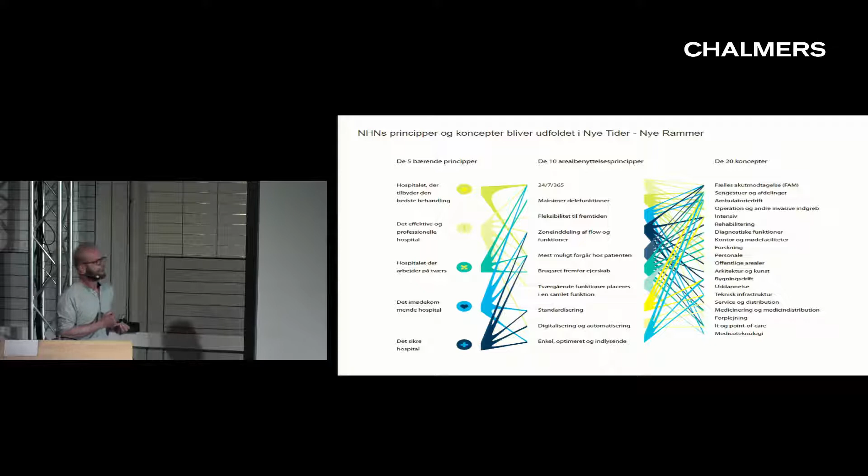And you get those very detailed binders of information that you have to process into a project proposal for the competition. Here was a little bit different. I think the program was very inspiring because it talked of principles, area use principles, and concepts for how these things should go together. And it was not tying everybody down into exact square meters and stuff like that.

So I think it all circles around these principles and concepts, around that we need to structure a hospital in a new way so we get the most out of it. And we have, first of all, to put the patient first, to put the patient in the center.

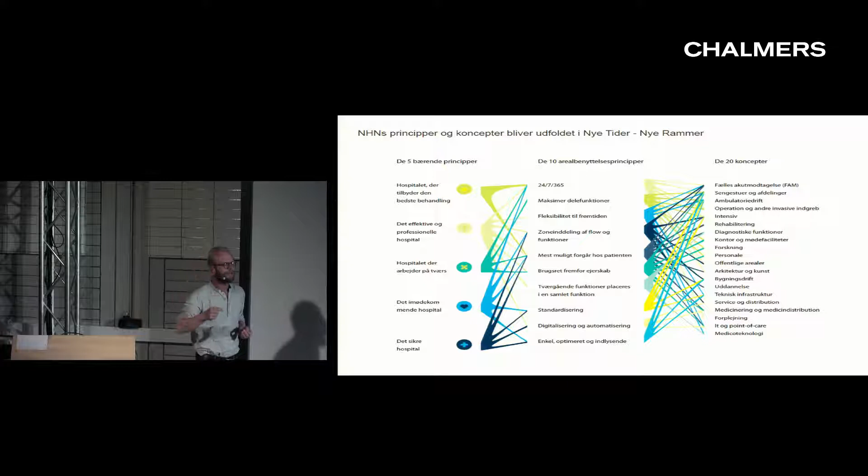This drawing, I don't know if you're familiar with Rorschach drawings, are you? Those kind of dots you get when you go to the psychiatrist, and you should look at them and tell what you associate with them. This is how we saw that one in the competition brief. It sounds a little bit fluffy, but I still think it's the right way to go, to actually ask for what it is that you want to achieve rather than specifying all the different rooms. So that was a very inspiring brief.

The other thing that really inspired us is the landscape, the site where we have to build this hospital. It's a greenfield hospital. Maybe I should just tell you how big it is. It's 122,000 square meters. It has about 660 bedrooms and 13 specialities. And the total investment is about 3.8 billion Danish kroner, with a construction budget of 2.2 billion Danish kroner. So this is the size of it.

But what really got us moving was, besides the brief, also this site. It's a very pristine area just south of Hillerød. And the landscape is very soft rolling hills. It's not too high. We have forest, we have grasses, we have meadows, but it's all held on the horizontal. And the sky is a very important element for being on that site.

So you could say that both the brief with the patient-friendly hospital and all the healing aspects, but also this site made us want to do a very low hospital. We thought that whoever should be there should be in very direct contact with nature and all the qualities on the site. So we started off by looking into different principles of how to organize the hospital in such a way that we could keep it low but still efficient.

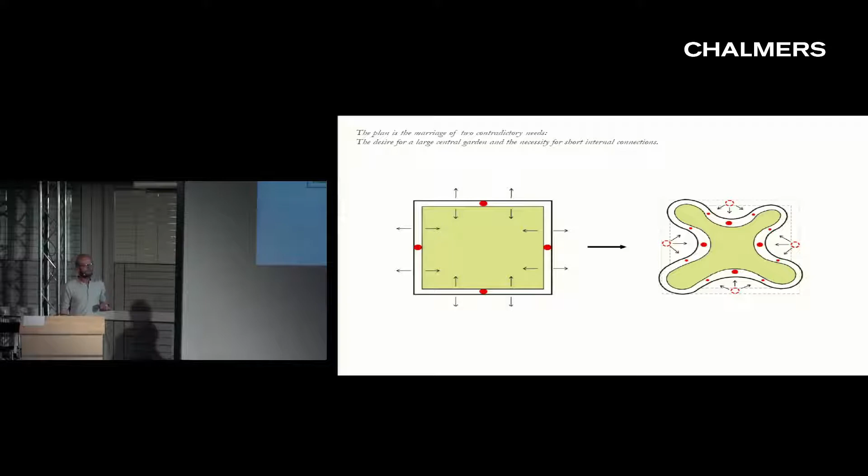But in order to get very short distances from a central point, we decided to move the red dots together, so there will be very close proximity from the center of the building to the cores, staircases, elevators of the complex. So this is why we started to look at this clover-shaped building, because in that way we could obtain efficiency and proximity to all the cores from a central point and still keep it low.

Now, the way we chose to organize that was in a 4-story building where the two lower stories are diagnostic and treatment, and the 2 upper floors are bed wards.

The way that the square meter works is that the bed wards only occupy the perimeter or the rim of the form, whereas the 2 lower floors actually take up most of the footprint. So on the roof of level 1, we had the possibility of having a big central garden.

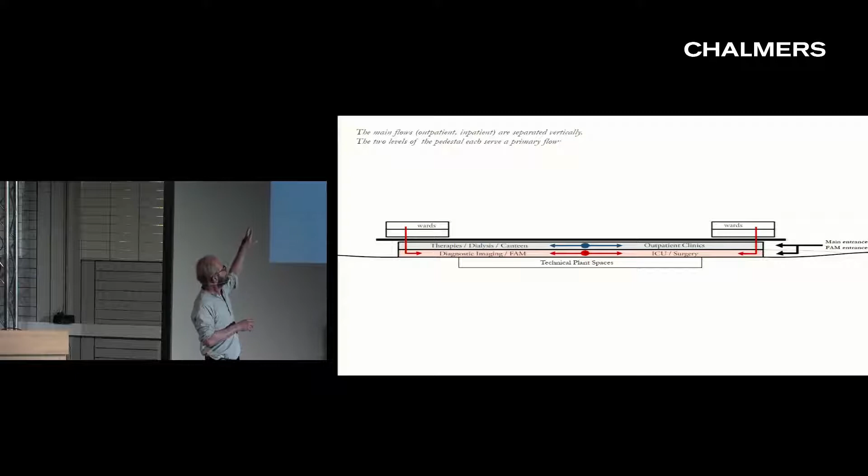Now, the way that we arranged the base or the pedestal was that on the ground floor, we had all the hot floors, all the very heavy technical installations, the diagnostic imaging, and this joint emergency department, the FAM, as well as the ICU, the intensive, and the surgery. We wanted them to be in very close proximity in order not to push the patients around too much.

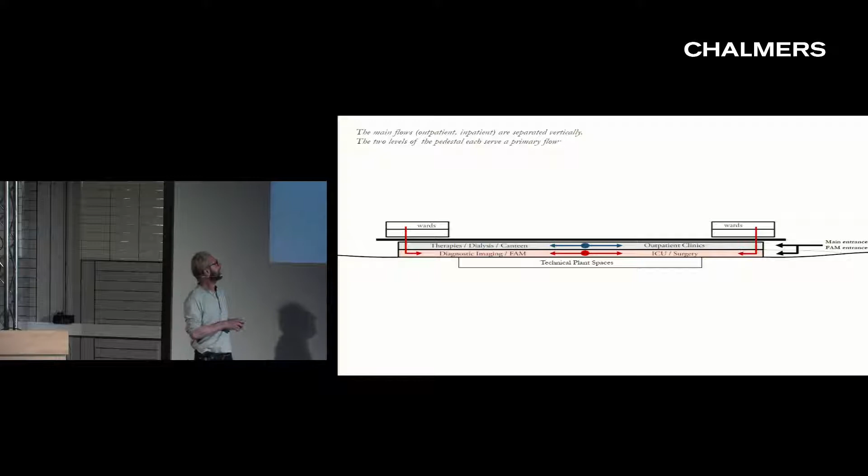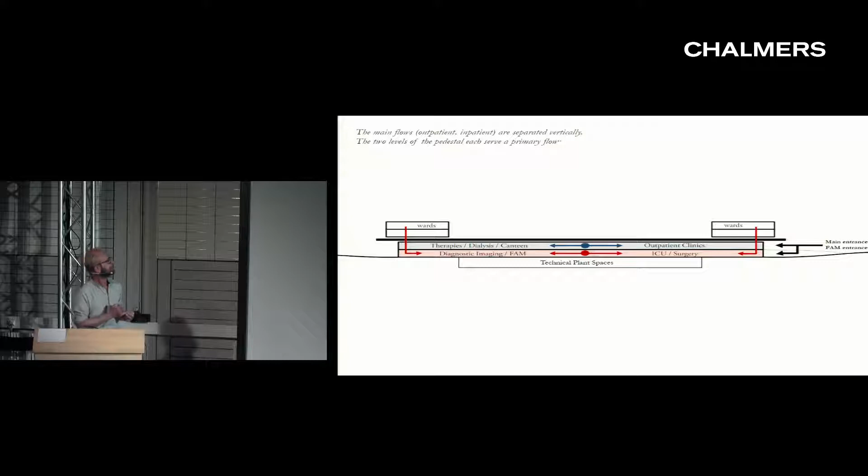On top of that, we had a floor mainly with outpatient clinics for day patients. And this is also where we would want to have the central lobby of the hospital. And then on top of that, of course, the 2 ward levels. The blue arrow here explains what the outpatient flow is, whereas the red is mostly the bedridden patient flow. And those two are separated. That's very important for us.

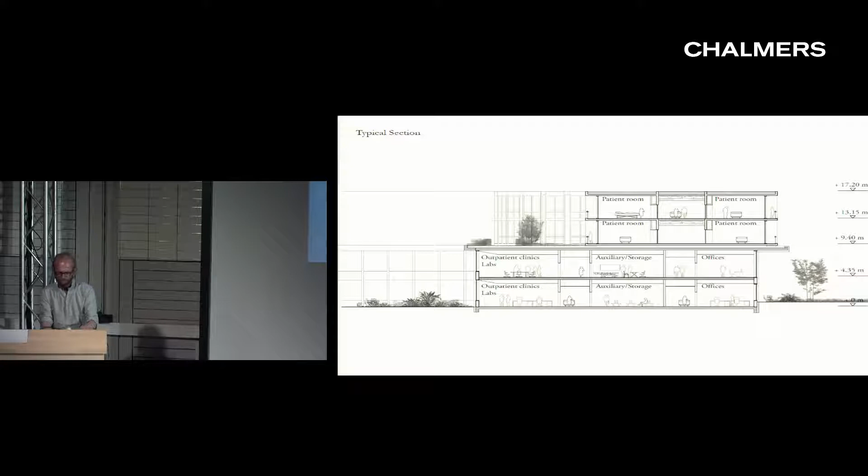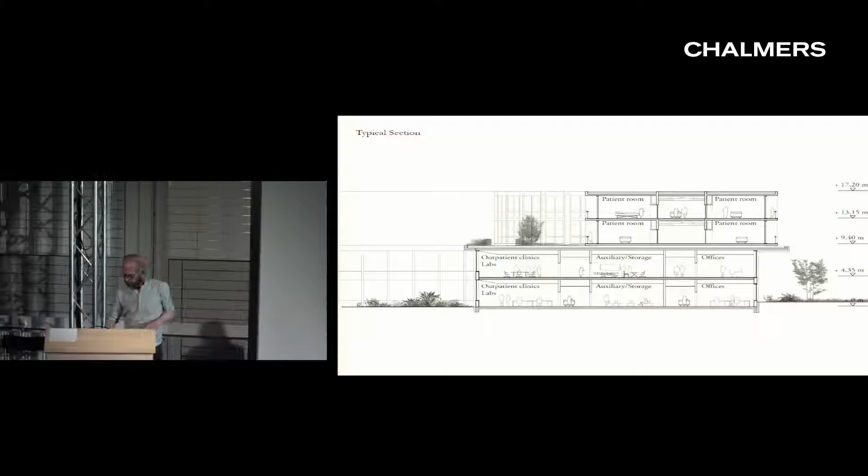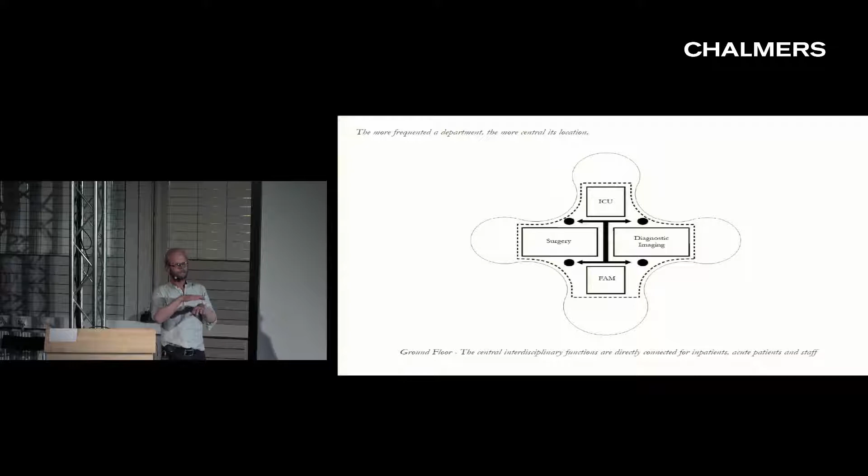If you take a closer look at it, you can see how it looks. It's a very low hospital that sits in the landscape, and it does have gardens above level 1 and gardens on ground floor also. Once we laid out the section with the hot floors on the ground floor and the outpatient clinics, therapies and stuff like that on the first floor, we started to look for organizing principles for our hospital.

And the first thing is that we thought that the more frequented a department, the more centralized is the location. So we tried to have all the departments that were very much in use all the time be very close to the center and therefore also very close to the lobby and the 4 cores that we laid out. And the other principle would be that it's very important that FAM, surgery, diagnostic imaging, and intensive care are very closely linked without interference of any other flows.

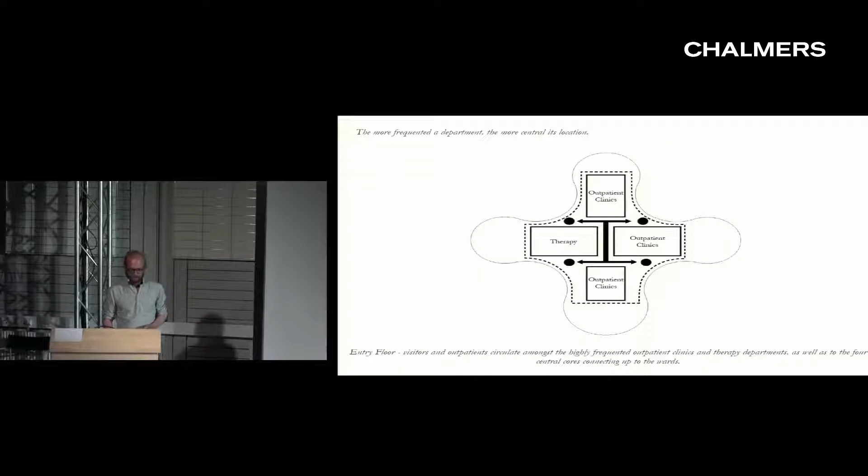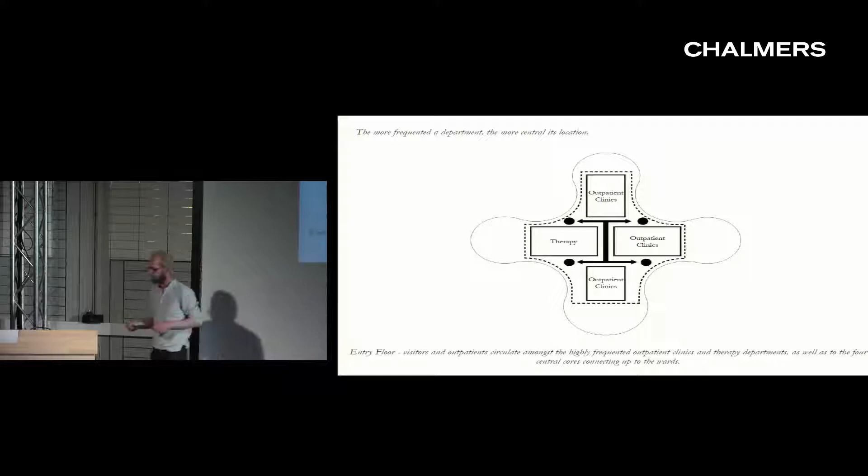That goes also for the first floor, where all the outpatient clinics and the therapies are located. They should also have the same logic that the more frequented a function is, the closer it gets to the center of the building and to the cores. Of course, when you prioritize, there are some functions that we push to the far side. And that would be offices, research, labs, and also the wards for the FAM, the Joint Emergency Department. And that's a choice.

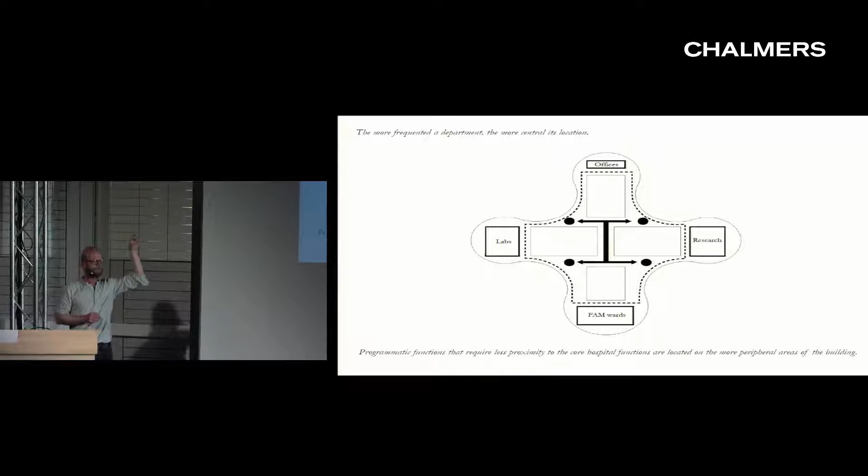I'll do this in English. I think it's part of the operation department on the ground floor, but it has a direct link to the bed ward related to the heart department.

Now we talked about the importance of having the vertical cores with the bed lifts, the patient lifts, the goods lifts, and the AGV lifts located so they can service both the central core, but also the 4 leaves of the clover.

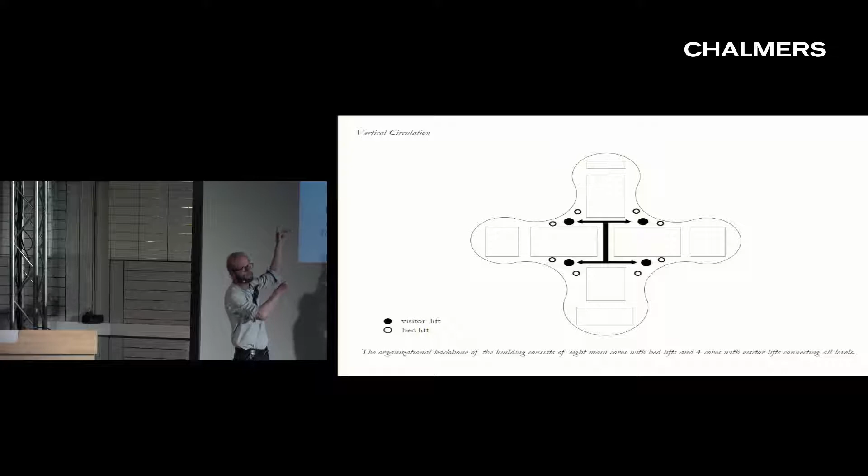When you look at it, if you take each floor plate and lay it out like that, you can see, can I point with something? Do we have a

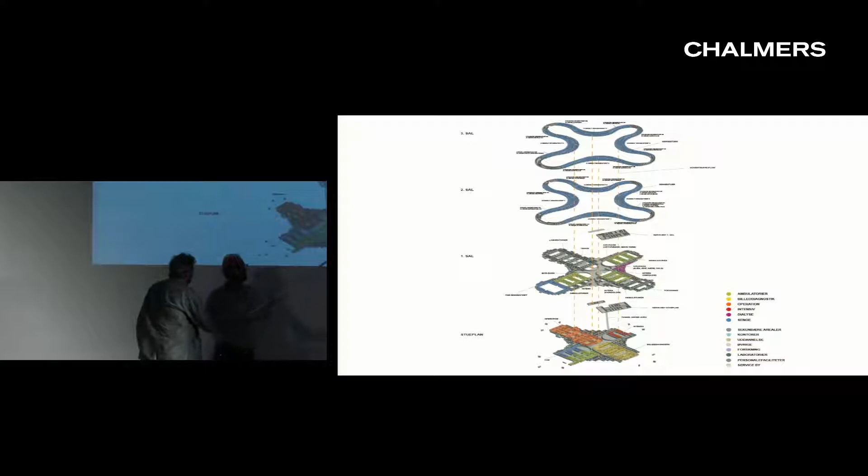stick or an arrow? But maybe you could see the way that it works, that on the first floor we have the entrance and the main lobby with the outpatient clinics feeding into it and the therapy. Below that we have the FAM, the diagnostic imaging, the intensive care and the surgery department lying down there. And on top you see the 2 layers of wards.

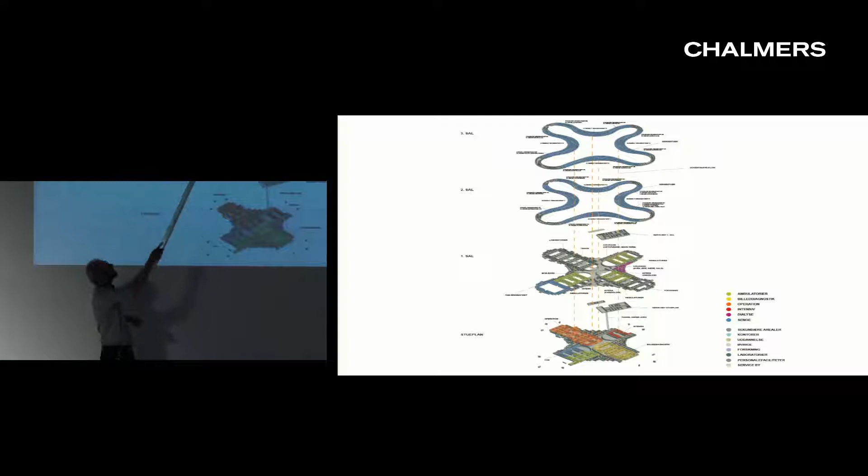Now, we think that flows are actually one of the main factors you have to think about when you design a hospital. It would be fair to say this is the first hospital I've ever designed. My background is more in designing airports and doing lab buildings, so this is the first one.

But when we got closer into designing the building, I realized that it's in a lot of ways like an airport. In an airport, you have to design for flows also. You have arriving passengers, departing passengers. You have to think about the Schengen, non-Schengen passport situation. We have to take care of food, luggage, waste, security, customs, and things like that.

When you design airports, this is really what you need to think about: how all these flows are functioning without interfering with each other. In an airport, it's about security, and it's about efficiency. In a hospital, it can be about lives. So if the flows don't work properly, it takes too long, you get mixed up ways of moving through the building, it's not going to be very good.

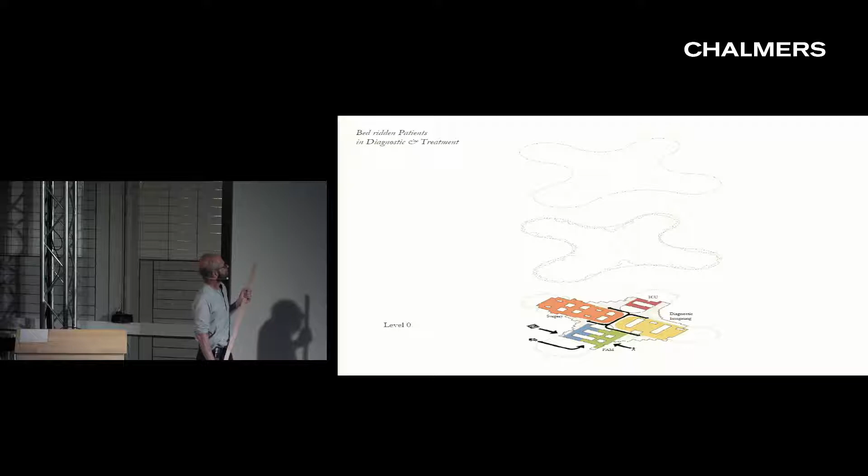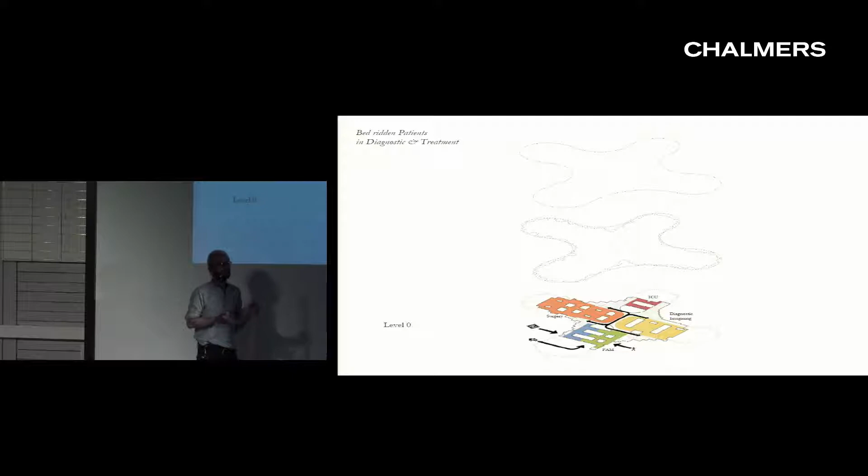So actually, these diagrams that I'm going to show you now are really the most important things to structure the whole hospital project. The first one is the bedridden passengers or patients. When they get to the hospital, they usually come through FAM, this joint emergency. This is where we have the reception for all patients coming, either by helicopter, by ambulance, or on their own.

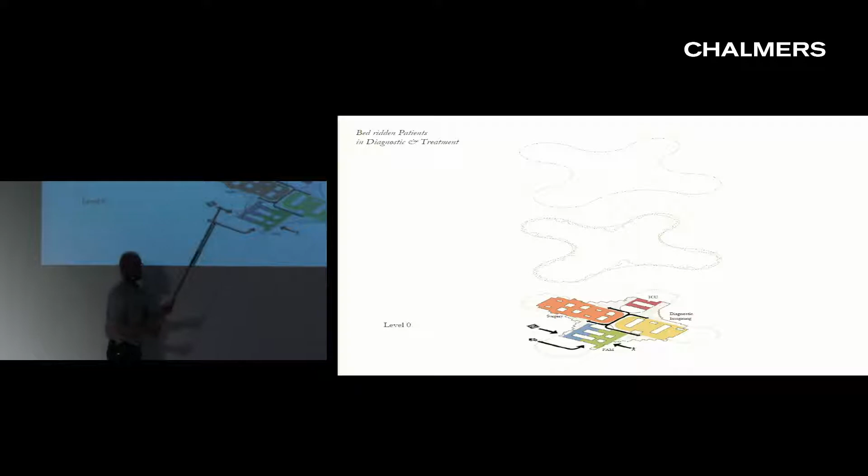They get transported into this area of the building, which is where the diagnostic and some of the treatment is taking place. It's like the mini hospital I talked to you about before. And there are some wards, some bedrooms just adjacent to that. This department has a very close proximity to the surgery, to the diagnostic imaging, and to the intensive care. So this is the main flow for them.

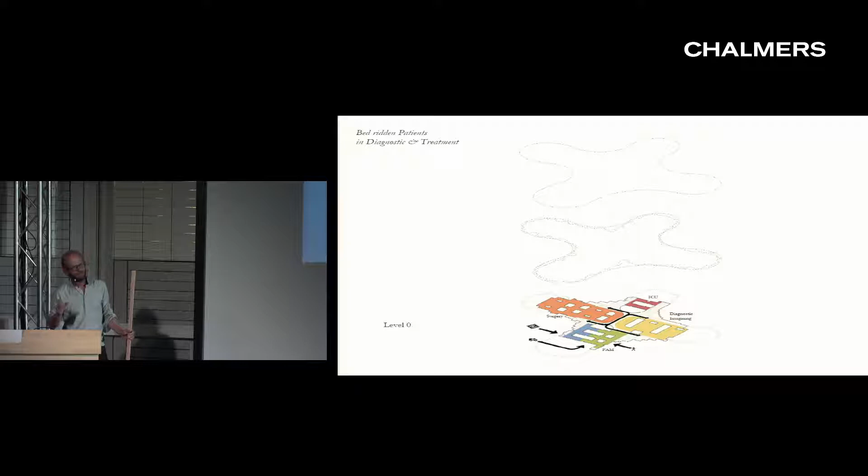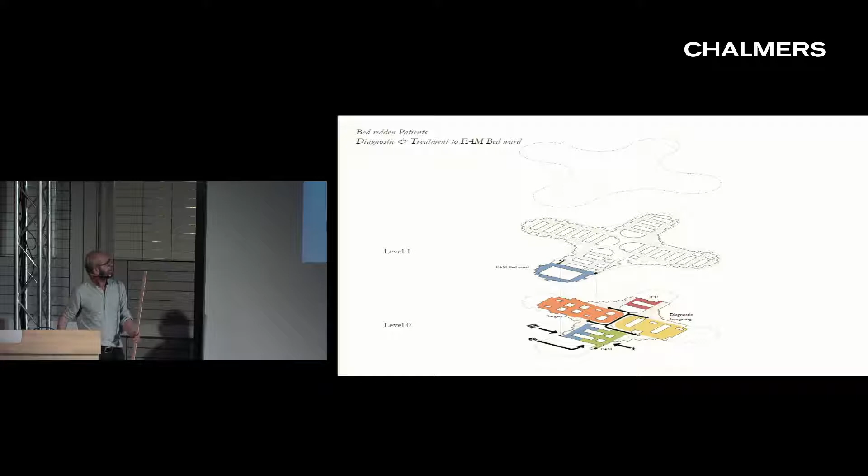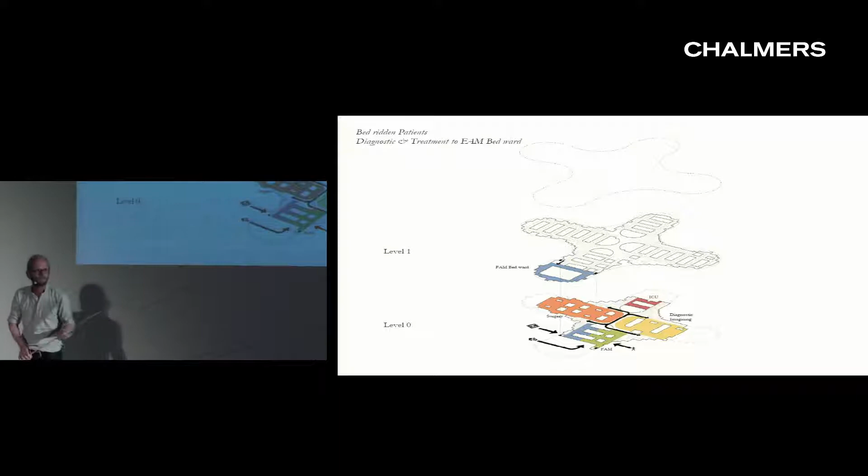Most patients coming into the FAM will stay there 12 hours, 24 hours, and either they get sent back home or they'll be sent to a department, right? This is the 12-hour beds for the emergency department, and these above here are the 24-hour beds for the emergency department.

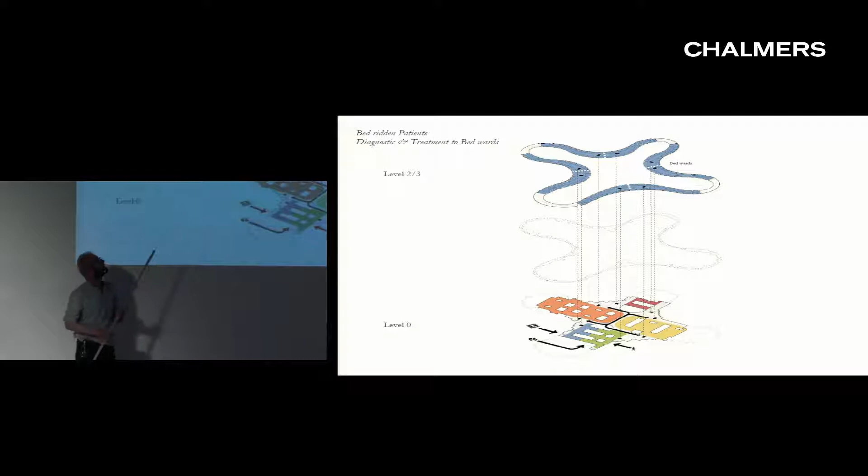It can happen that acute patients coming into the FAM need to go to the different departments, and that's where it's very important to have good bed lifts going directly to the relevant department in the bed wards.

On level 1, this is where we take care of all the outpatients. The outpatients will arrive in the main entrance here and will use the lobby to very directly get distributed to the relevant outpatient clinic or the therapy they need. This is also where we have the clinical chemical department for blood testing and stuff like that. So this is sort of more the day patient floor.

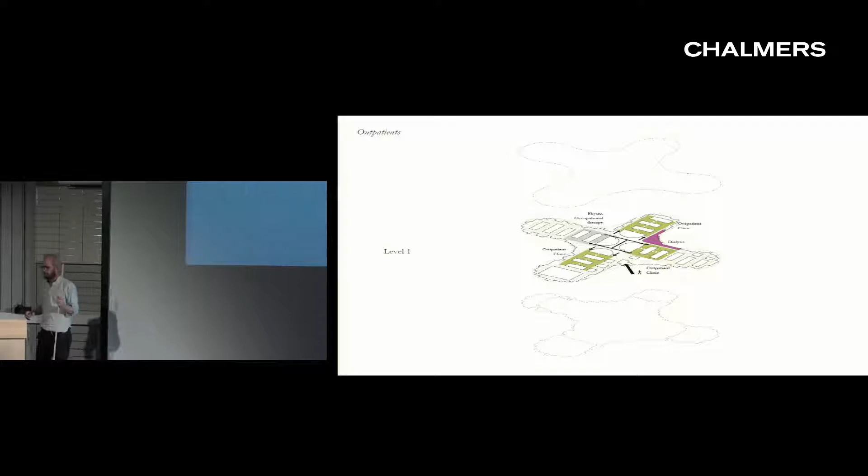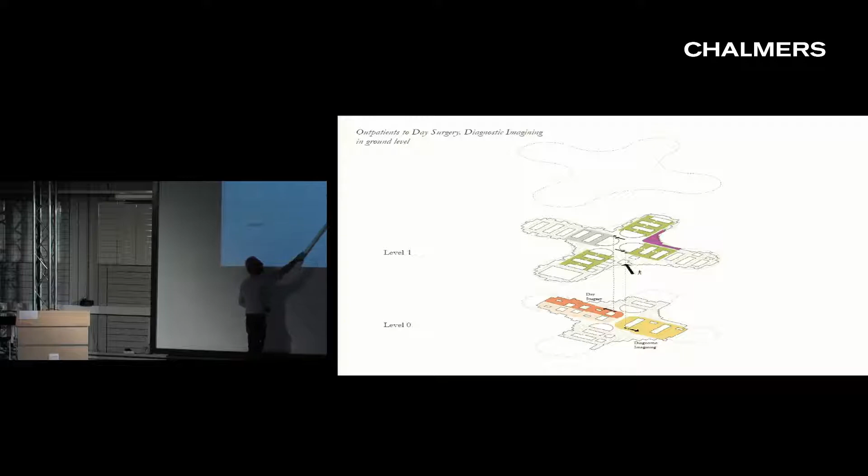And then again, all this traffic can happen without interfering with any of the flows of the bedridden patients or the staff. Now, it can happen that some of the outpatients, such as endoscopy and X-ray treatment for the day, need to go down to the hot floor on ground floor, and the way that happens is they enter through the same entrance to the lobby in the middle, and there will be dedicated stairs and elevators going down to the piece of the surgery that has to do with day surgery and endoscopy, and the same for the people going down to receive X-ray treatment for the day.

This is usually the very tricky part to solve in a hospital without crossing any main flows, but I think we managed to do that.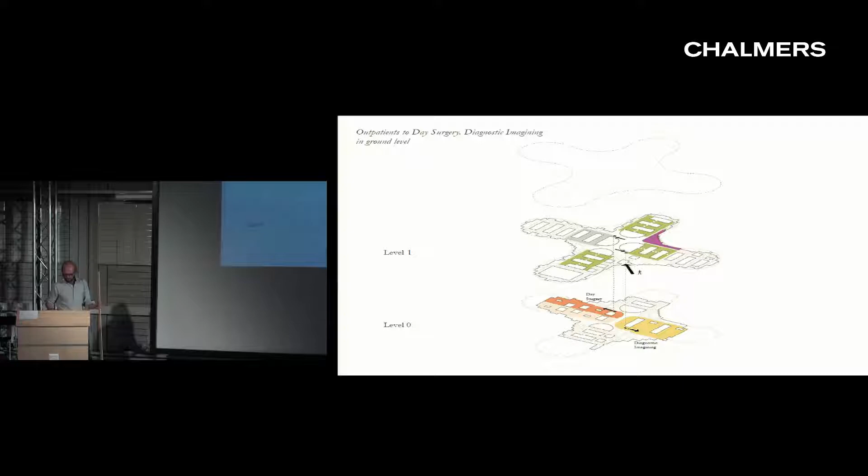Another flow that we have to accommodate for is some of the bedridden patients in the wards will occasionally need to go to some of the outpatient clinics on that floor, and we need to design a way that they can actually get transported in their bed down to the floor with outpatient clinics, get treated there and go back again.

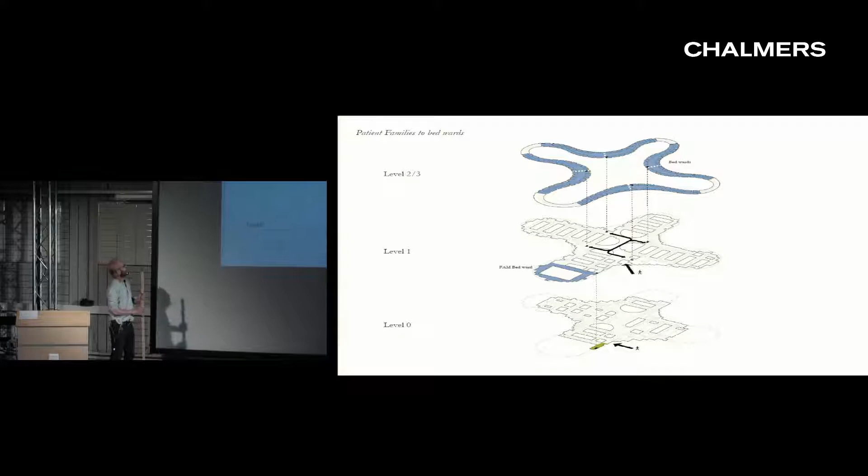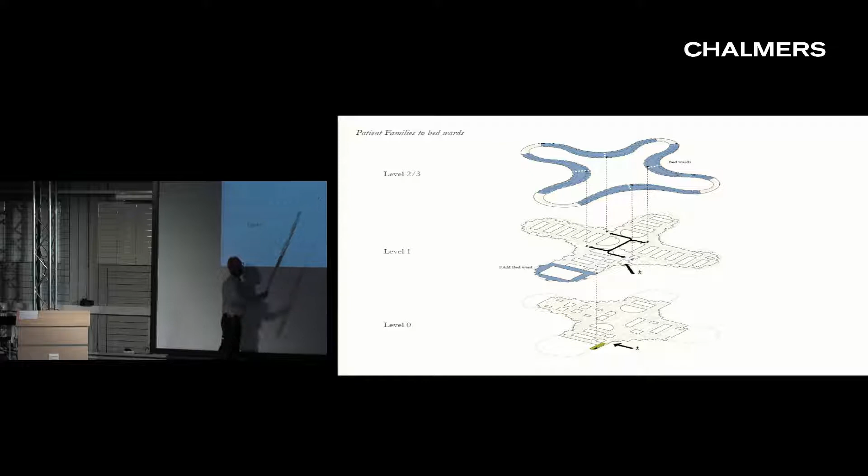Then another very important flow is families and visitors. They actually follow the same flow as the outpatient clinics. And from the central lobby, they will get sent to the wards on the two floors above, or the people coming to the FAM can actually also directly get to the FAM beds that are on the next floor.

A thing I haven't spent too much time on, but I'll just mention it, is that apart from the four-leaf clover form we have what we call a service village. That's where we have the kitchen, the goods delivery. I think we also have bed wash there. And this is all being serviced by AGVs, auto-guided vehicles, which are robots, that through a tunnel from the service village to the basement of the hospital take special packages and distribute them all over the hospital to the right department or to the right use.

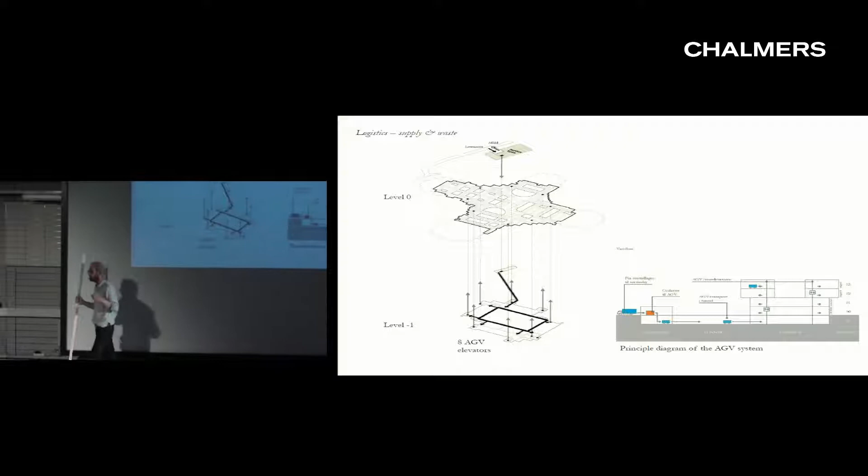Right now, we're doing the specification of this, and the wish is actually that, for instance, sterile goods get packed in special packages for each individual operation, and then get shipped to the right surgery theater. So everything that's needed sterile is there in one package, and it's all been done automatically and transported by these robots. We still have the pneumatic tube system for blood testing and stuff like that.

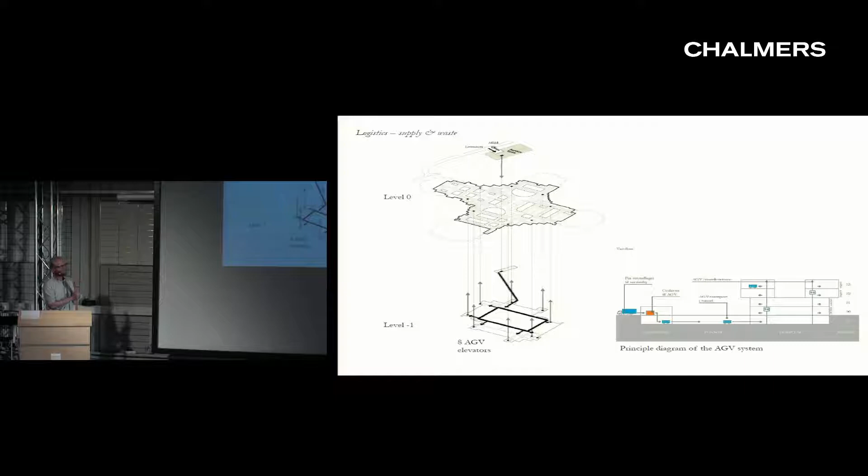So there's a lot of mechanical systems to sustain the use of the hospital. And they also have to flow in the right way in order not to jeopardize any of the other crucial flows.

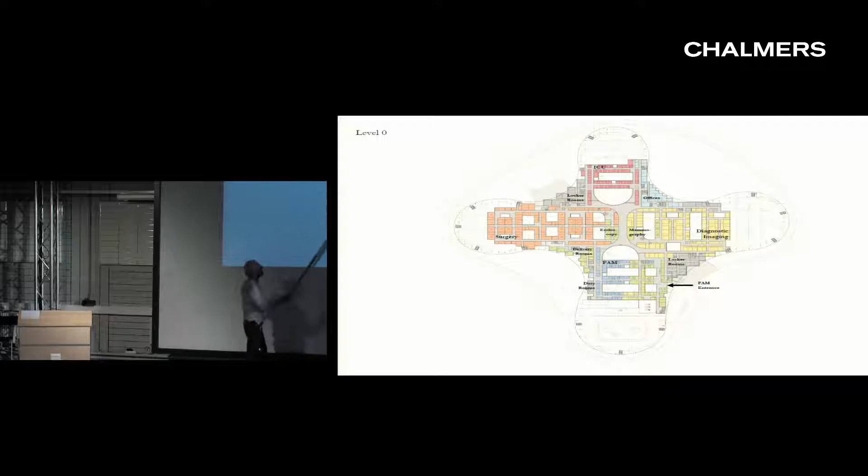This is a drawing that tells you how the ground floor is actually planned as it is right now in a real drawing. I'm done with talking about flows now, so now you can relax a little bit. But on the floor down below, we do have the FAM area here with the main entrance for people coming on their own here, the ambulance yard, and the entrance for helicopter patients. And it's divided into a diagnostic and treatment portion of the FAM and a bed portion.

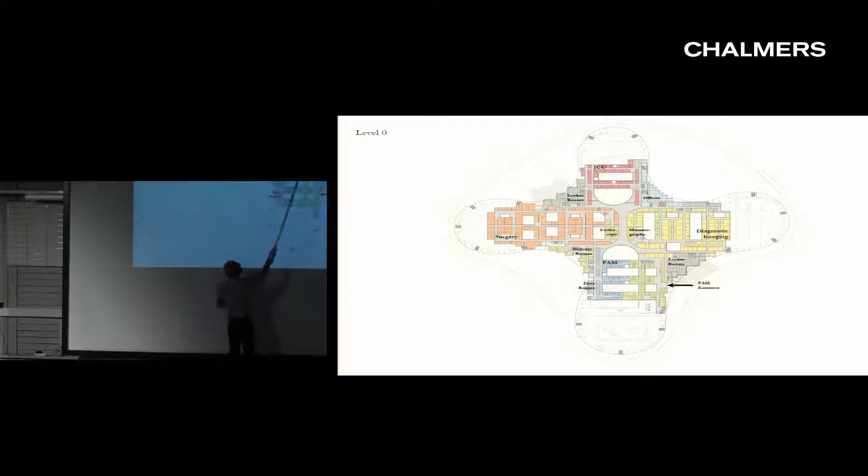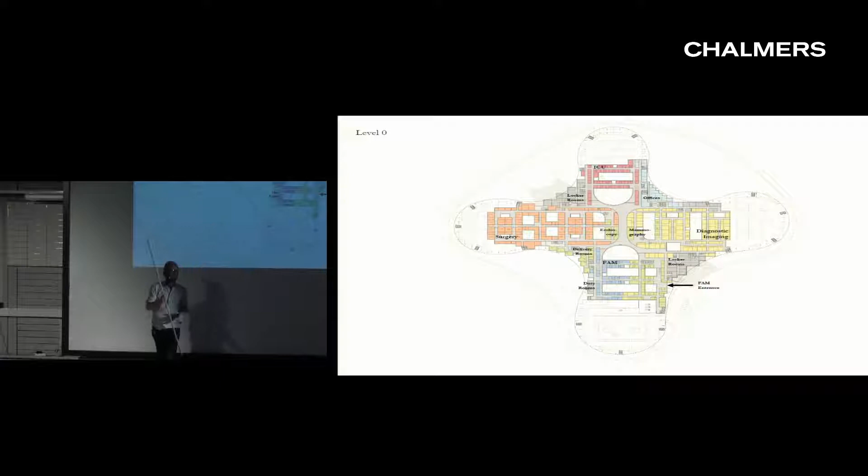Up here we're having basically uniform layouts of the surgery theaters. We got 8 different units. And I talked about the day surgery and the day X-ray treatment. Here we have the diagnostic imaging, and on top here we have the intensive care. What's very important is that the distances between the different departments here are very minimal, so you can actually get transported from one department to the next very easily. And the other one is that they're very close to the vertical cores that get them to the bed wards and even to the outpatient clinics.

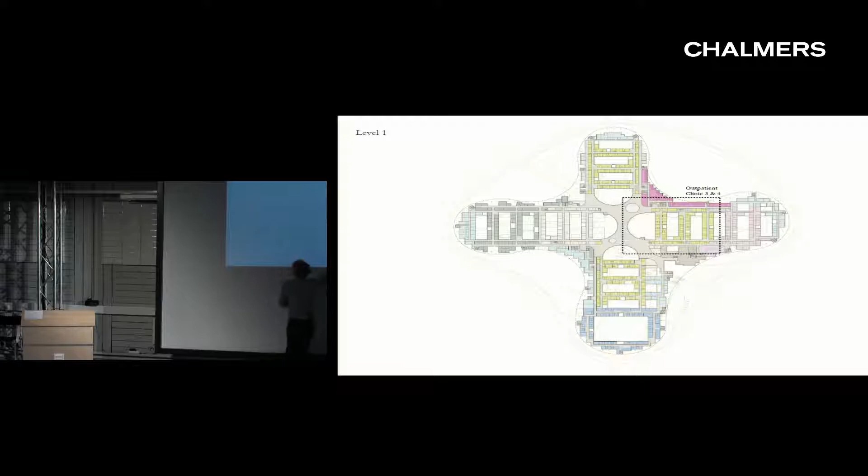You could say that the same logic goes for the first floor, where you have the main entrance coming here, and you get into the central portion of the hospital, which is the lobby, and from there, the patients can actually, along the courtyards, go to either the outpatient clinic or the therapy that they need. And the whole thing is supported by a second system, which is on the outside for staff and for bedridden patients and for goods.

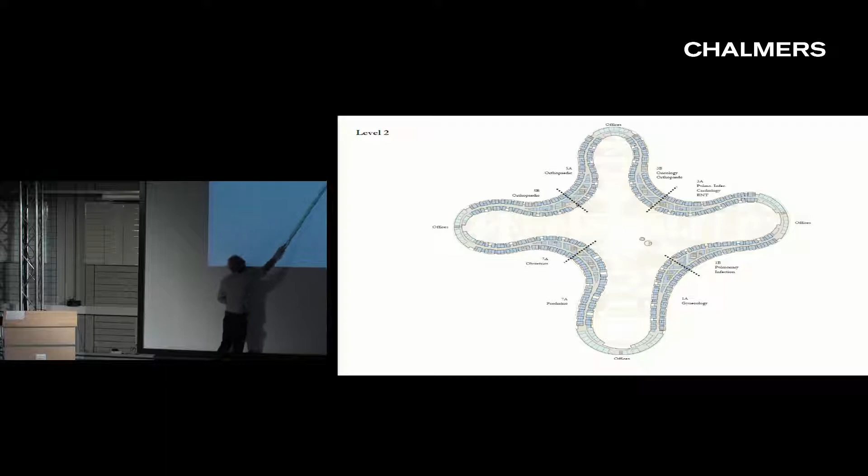On the 2 top floors, we have laid out the wards. And the wards are in a logic that we have sort of 4 alike portions, and there are 64 bedrooms in each of them, and they are arranged in 2 bed wards of 32, and they're broken down into 8 times 4. So for each 8 rooms, we have 1 nurse station and 2 departments of 32. They actually share a lot of facilities such as kitchen and lounges and stuff like that.

That was a question, right? No.

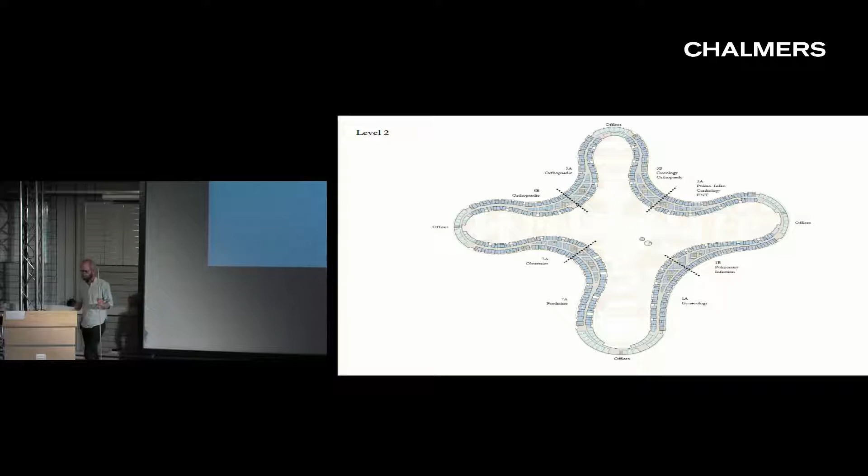If you take a little bit closer look, you can see that the way that we've arranged it is that each bedroom is about 19 square meters, including bathroom. And they've all been given a balcony, both on the inside and on the outside. And the shared facilities are mostly around here. This is also where you have all the technical, the shafts for the HVACs and the ventilation units and stuff like that. And for each department, there will be a dining area that's very close to the exterior.

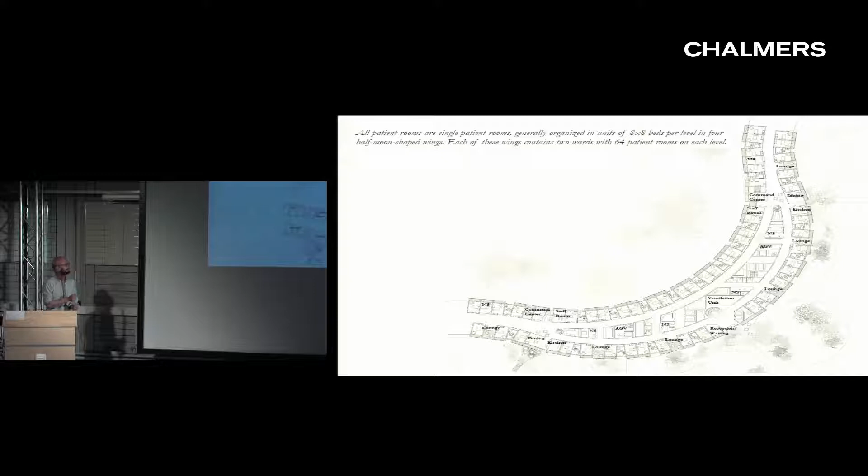Two of the departments are different, for neurology and for mother and child. The rooms are slightly bigger. For the neurology patient, it's because you always move them around in the bed, and for the mother and kid department, it's because the family is usually staying there overnight. But the rest is very much the same.

Now, even though this form looks organic and all this, we've been very concerned about flexibility and standardization, I think it is in English, sorry. Flexibility is very important for the future. It should be very easy to adapt the facilities to new use. Everybody knows that hospital equipment, IT, medical equipment and all that will change. The way that you treat patients will change. So we need to plan for that kind of flexibility to a very high degree.

The other one, doing things to standards, is not only about saving money on the construction costs. It's also about trying to achieve secure procedures for the staff. If all the rooms that a nurse works in are laid out the same way and fitted out the same way, then it's easier to have the same procedure with the patients. And the same goes for the operating suite and X-ray modalities. So it's not that we just want to make it the same just for being the same. It's also because we want to sustain that the operating procedures are the same all over.

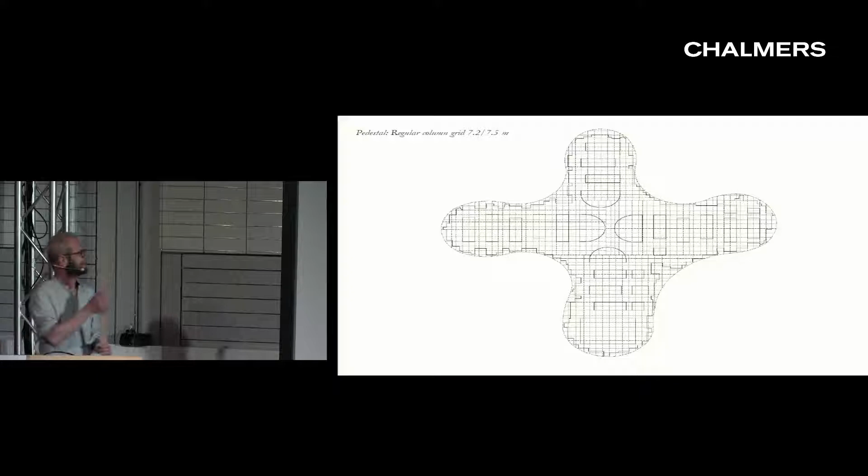If we are looking at the two lower floors, it's really a very, very simple structure that we're trying to do. It's a column concrete slab on a grid. It's all orthogonal, except for our beautiful curved gardens around the lobby. Everything is actually totally orthogonal and on a grid.

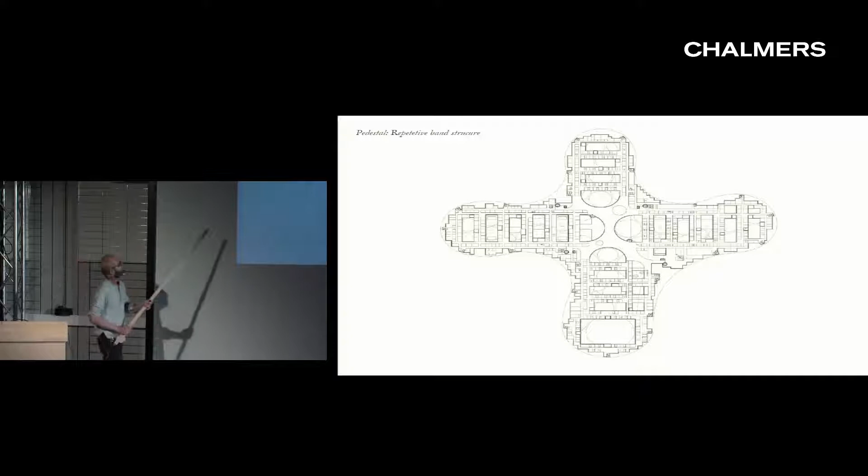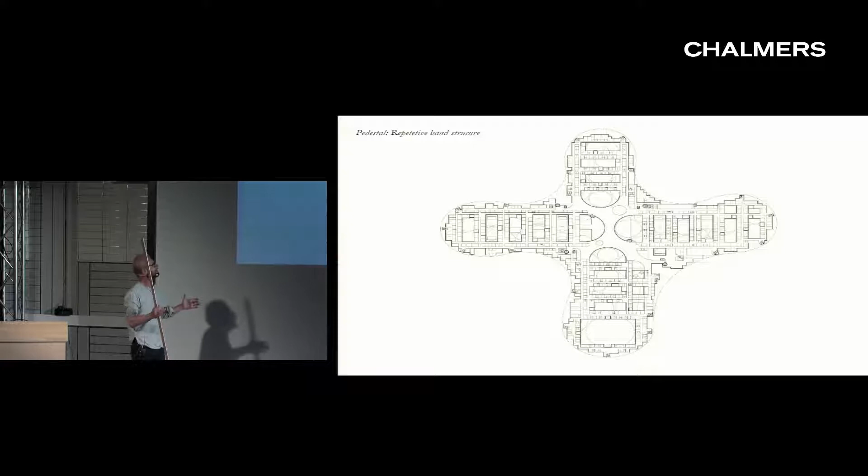The way that we lay out spaces is with these bands that are totally alike. For instance, the outpatient clinics. They're laid out exactly on the same grid, and a room here would be the same as a room there, but also the supporting facilities, the cupboard for linen, things like that would always be arranged in the same way. So it shouldn't make too much of a difference for a nurse working here or a nurse working there.

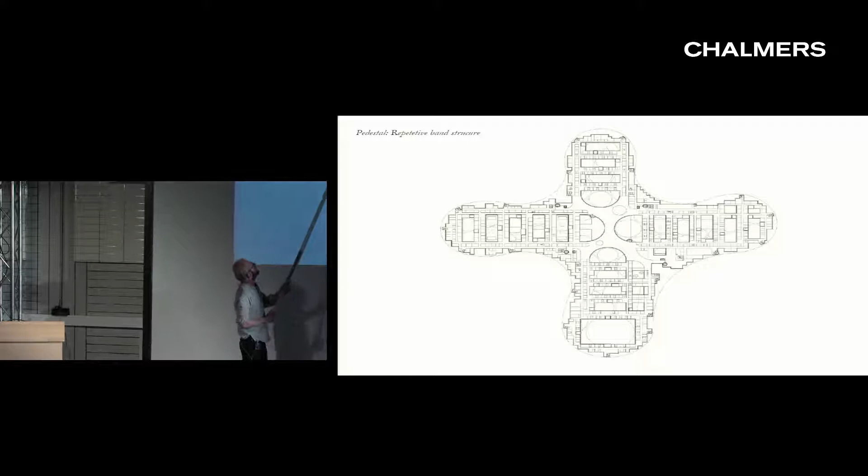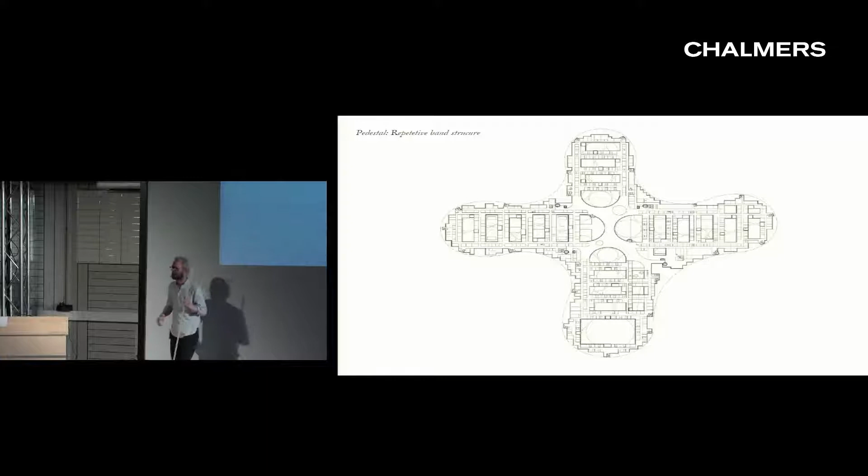We also said that as the outpatients use the inner corridors and the staff and bedridden patients the outer, you can actually make a division of the bands any way you like it. So it's a flexible use of the same square meters, you could say. Maybe you could see it even more clearly here that we deliberately work with the same kind of bands all over the first floor. And on the ground floor, you can see that the surgery theaters, the X-ray modalities, and the intensive care units are all laid out the same way and shaped the same way.

In the hospital, we've just been through the design specification phase.

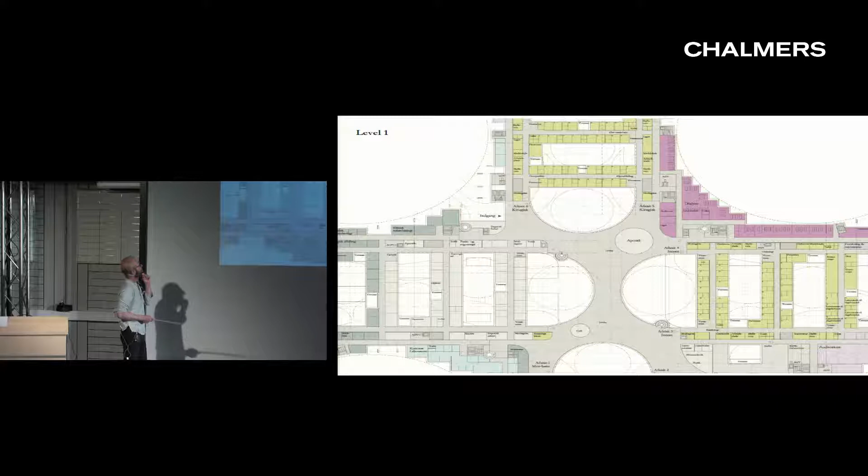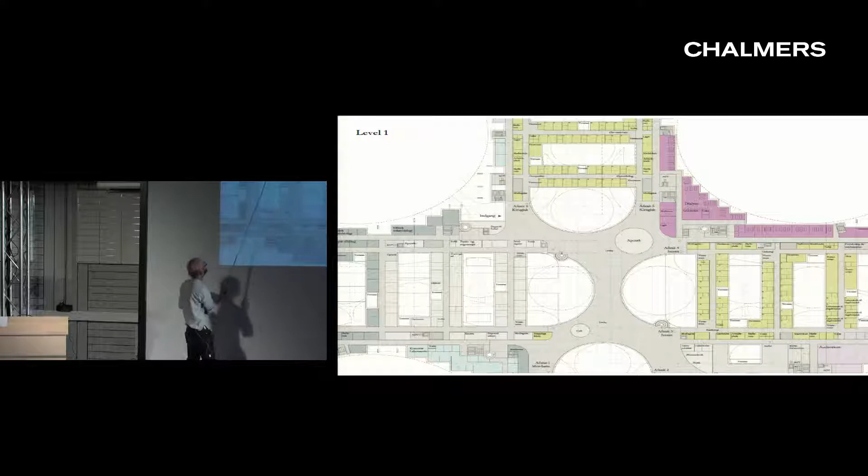Yeah. And if we get a little closer, we can see the system of the bands that faces a courtyard. We can see the system of the corridors that is being used by the outpatients, and the corridors that are mainly used by the staff. So the idea is that the outpatients come from the central point and move out along these courtyards to the actual outpatient clinic, whereas staff and all others will use the outside corridors to service it all. Yeah.

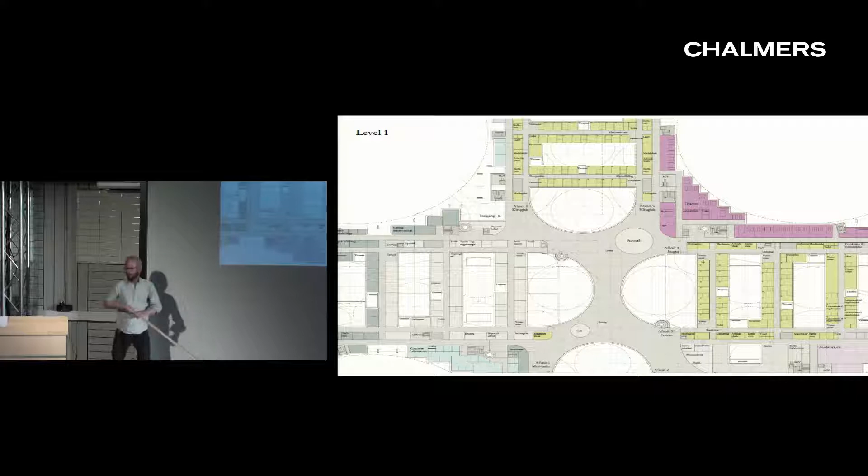Now, another thing that we really wanted to emphasize in this project is we wanted the hospital to have a very clear and very sort of intimate relation to nature. It's not only about, you've probably been talking a lot about healing architecture and how patients in close contact with nature and daylight and sunlight maybe get a better cure or even a faster cure. Of course, this is a very important element in the way that we think hospitals, that we should be able to provide that. But on top of that, we also think that if we can use all the landscape elements, our courtyards, our beautiful site, our central garden, to help with wayfinding, that would be really good.

One of the things that I fear the most when I enter a hospital is the wayfinding. You talk to the receptionist and she says, you're going to take lift number 34 and then take corridor number 8A. And that's very scary for me. So what we try to do here is always to give a landscape quality, to orient yourself while you're finding your way through the hospital. So that's another way of seeing it.

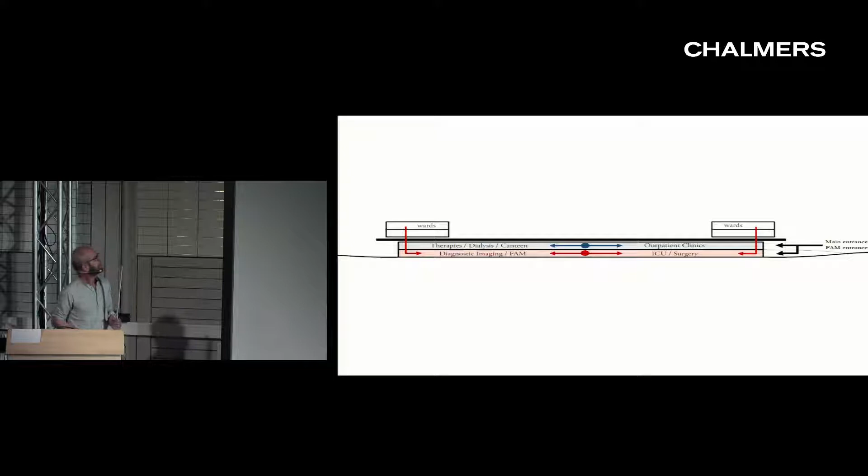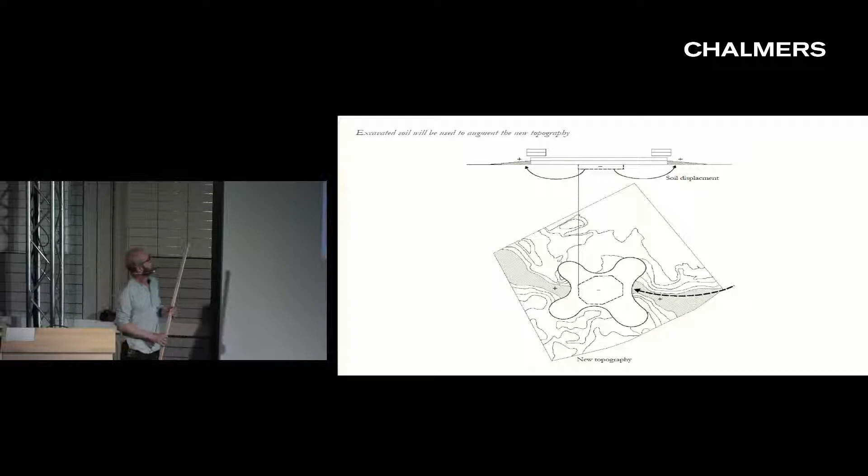You might remember the way that we laid it out with the two diagnostic and treatment floors with the ward above. And one of the things that we wanted to do was actually to bring the main entrance on the first floor. So in order to do that, we had to take a look at the site conditions. And one of the things we tried to achieve here is that the soil, the earth that we dig out for our technical basement, is what we use to ramp up to the main entrance and to the FAM entrance. So we make a very slight variation of the natural landscape in order to accommodate that.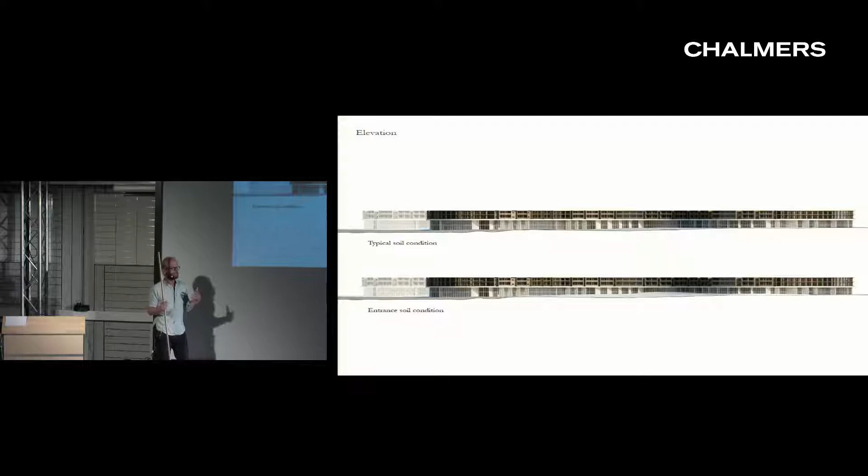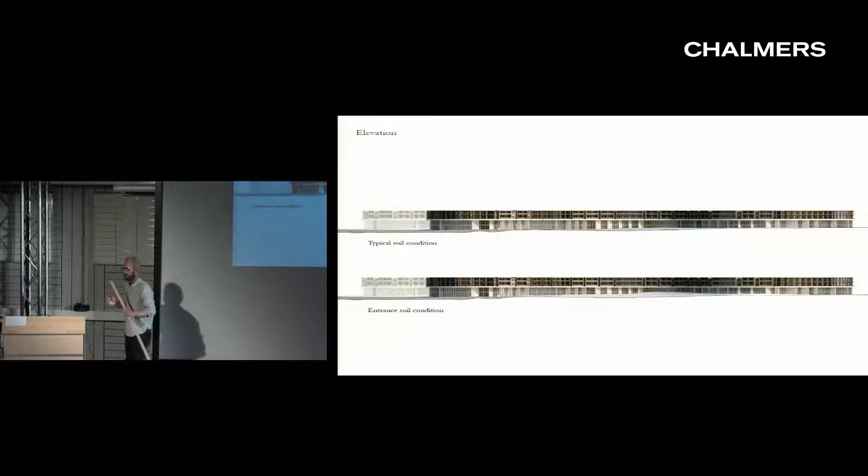The way that we see it as architects is that we like to express that the 2 lower floors are shared, they're communal, they're even urban, something that we share. And it should be very efficient and very easy to find your way around it. It's like being in a nice city, you could say. Whereas we would like to express that once you get treated, then you're in your own bed ward, and we would like the character to be much more homely and small scale. So you can actually read that in the way that we've given facades in the architecture. Even here you can see this is the main entrance, this is the diagnostic and treatment floors.

But above that we've shaped the bedrooms more as little houses that express themselves as little houses, and they do have their own balcony, but it's a very different scale.

Now, if you move further in from the main entrance, this is where you would be. And from here, this is where you find your way to the different departments or to the vertical cores. But these rooms are very much given quality by all the different courtyards. And from here, you can also see right up to the big inner garden above level 1 and to the bed wards.

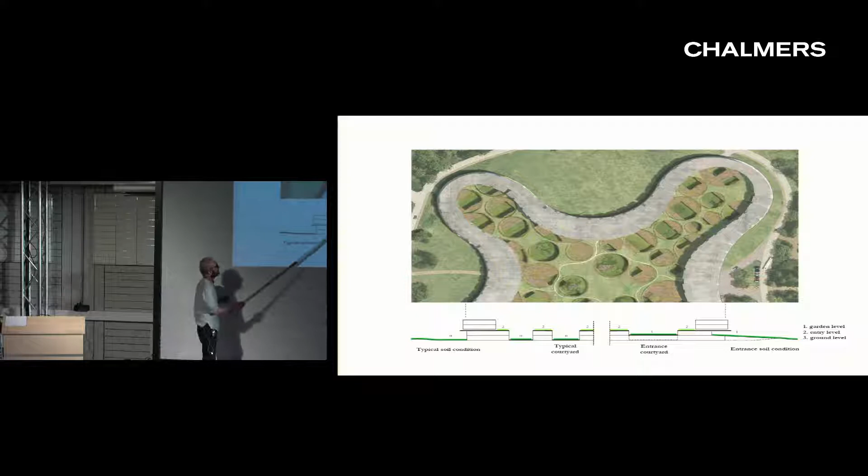It takes a lot of study to actually be able to do that, because we wanted, seen from the bed wards, this central garden to be perceived as a big open garden. But we also need to give daylight to the functions below. So this has been one of the things that we've been investigating very closely, to make sure that all the spaces in the 2 lower floors, even though they're in the middle of our structure, will receive sufficient daylight.

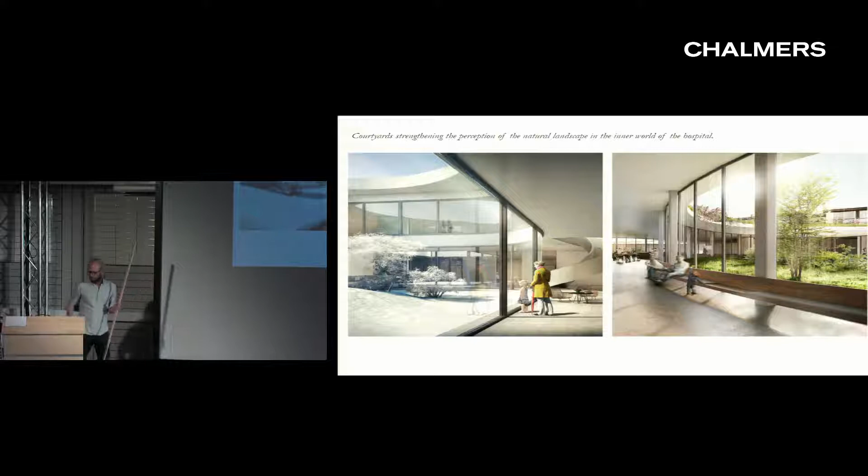I think also in Sweden you have the same codes for daylight, that people that work must have daylight and a view to the exterior. So this is how we try to achieve that. We plan to give the different courtyards different qualities, so we can use it as wayfinding, as I told you.

Can you walk into them? Can you walk into the gardens? In some of them you can. We've not really gone there. Another thing we have to solve is how to get the lawn mower in there. We haven't solved that yet, but this is what we're looking at.

The courtyards right next to the outpatient clinics, they all have terraces. You can go on a terrace, but we don't have too many entrances going from the inside directly out to a courtyard. They're mainly for giving daylight and providing nature to the middle of the building.

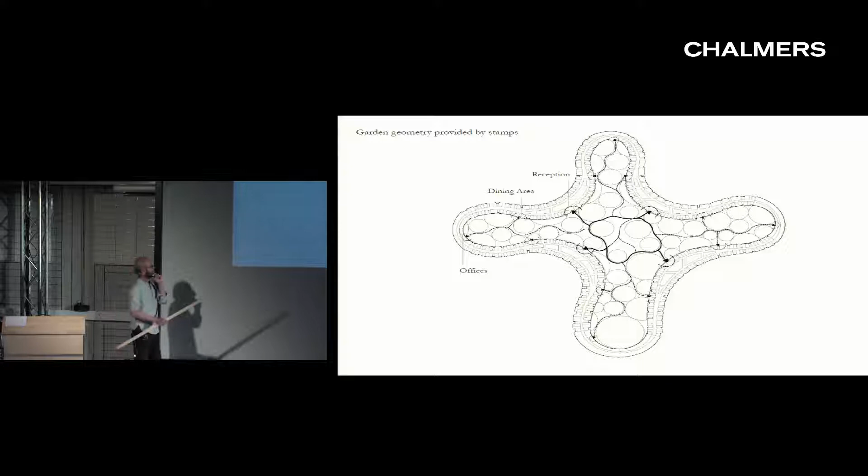We use those round hedges to shelter, so you don't fall into the courtyards, but also to make sure that the rooms facing the inner garden get privacy. We think it's okay for people to walk from one kitchen area to the next, and we encourage that. But I don't think it would be a nice situation if you're in this room and people can get all the way up to your window. So we use this kind of round hedge system to achieve that.

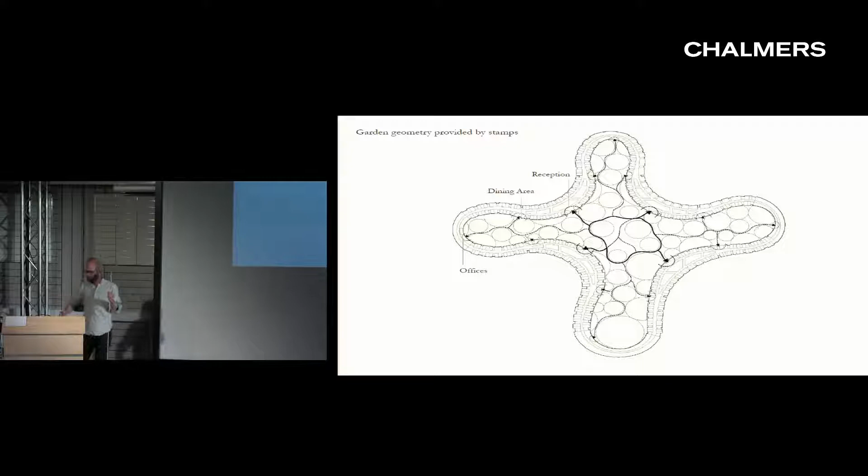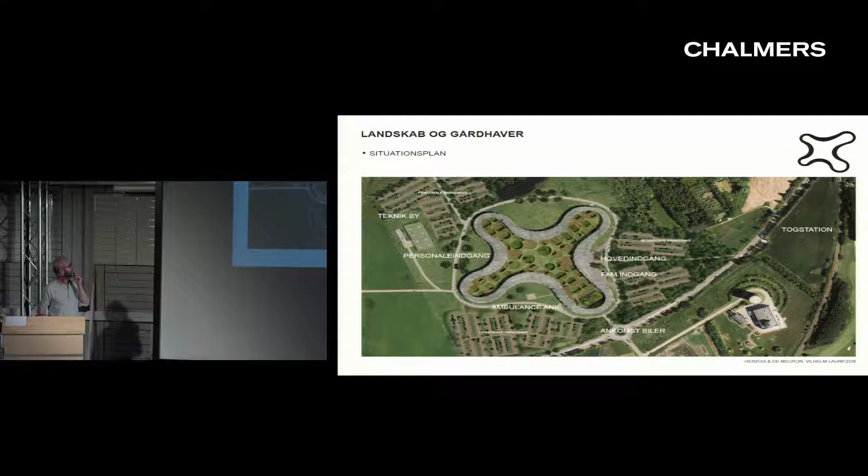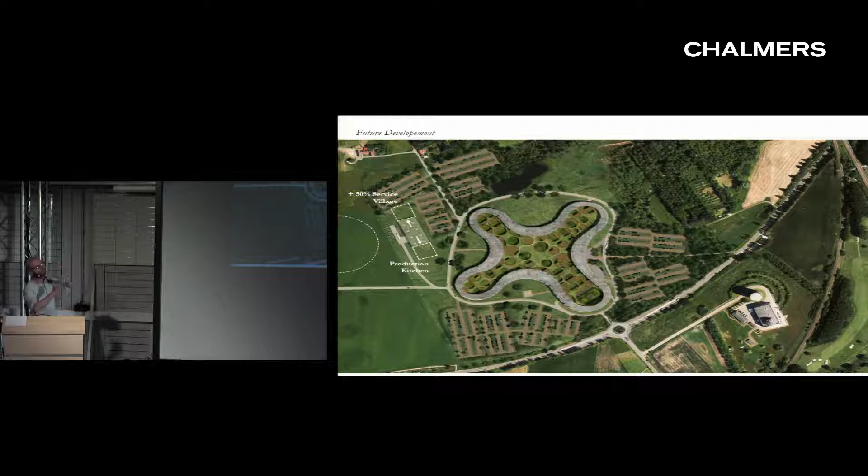Now, let us just pass that one and go to the future development. What I mentioned before was that we have this technical service village that needs to expand by 50%. That's planned for a production kitchen and for further additions west of the site. The region plans to do a psychiatric facility west of the hospital, and the service village is supposed to service both of them.

Now, extension of the hospital is very important because we do need to have an extension strategy where we can build, say, a lot of new X-ray modalities, or we can build just a single one. And what this project allows for is that, in the footprint on the ground floor, we can extend diagnostic imaging by 50%, we can extend surgery by 20%, and ICU by 20%, and the FAM can also get 20% bigger. And that's under the footprint.

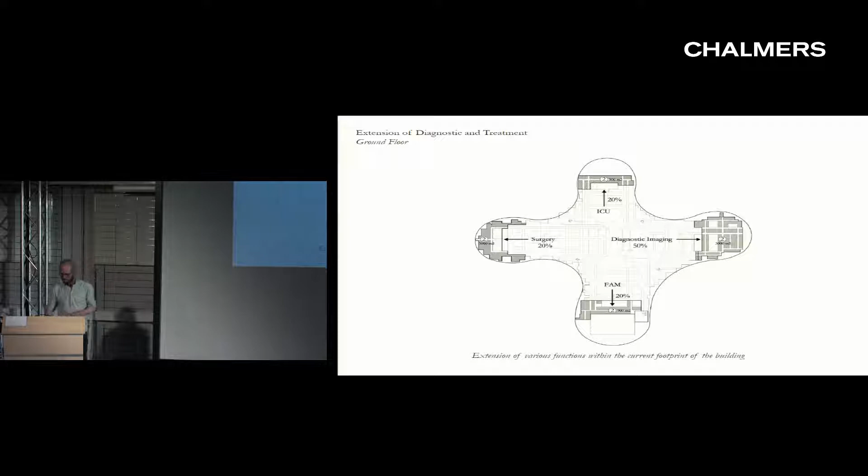When we look at ways of extending the outpatient clinics area, we're saying that maybe we could take some of the functions that are placed there right now and place them in another building on the site, and then extend the outpatient clinics. Even the other functions, such as research offices and labs, are based on the same grid as the outpatient clinics. So this is another move you can take.

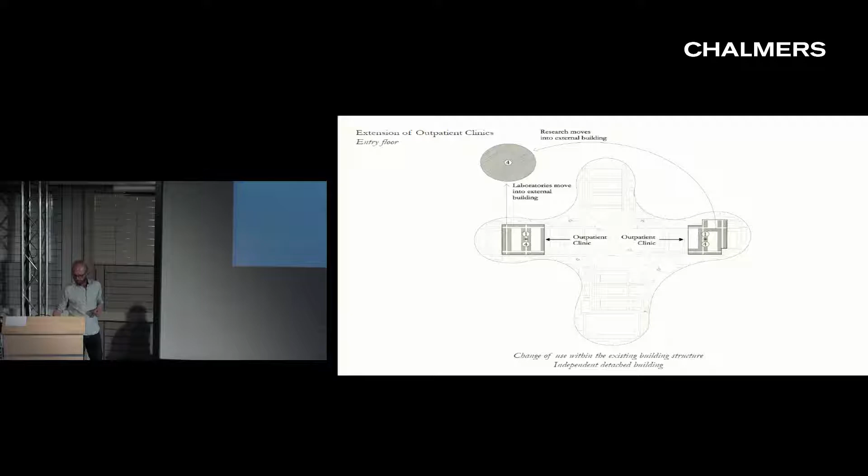Bed wards is very political. Everybody says that maybe we need fewer bed wards because the treatment time of each patient gets much shorter. So you might expect that some of all these bed wards that we laid out would become redundant, and therefore it's very important that they can be used as outpatient clinics or offices or whatever.

But opposed to that, there's a political discussion in Denmark on, I don't know the word in English, but this hospital might serve a larger population than we anticipated in the start. Optageområdet hedder det på dansk. So we might have to add maybe a third more bed wards. It's not decided yet, but if you make that decision, we have ways of doing it. We can actually add 2 bedrooms to each 32 ward, and also we can add another floor, 4th floor it might be, of bed wards all around it.

The way that we've arranged it with those prefab units, it's not that difficult. You can actually hoist them and place them. It's a very quiet construction site. And therefore it should be possible to actually add bed wards on top of the hospital. This is where this project is very, very different from all the other hospital projects in Denmark, that we plan to have our main additions or extensions either below the hospital or on top of the hospital.

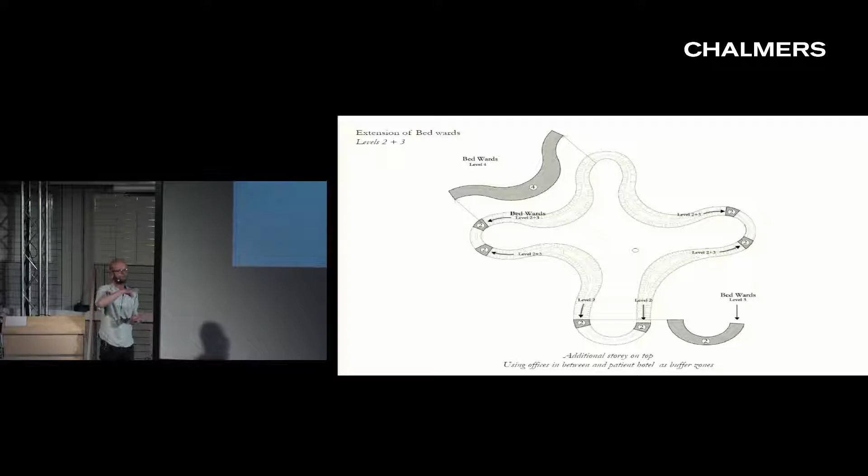And that really occurred to us when we took a look at the other hospitals. When we did the competition, we sat drawing this four-leaf clover and were very happy about it. Then we looked at the other hospitals with the exact same program, the super hospitals in Denmark. And we thought, maybe we're wrong and they're right, or maybe there's something we don't get, because all the others are mainly about having this main street on the first floor, and then you have these bar buildings connecting to it. And these bar buildings can be extended as you like. And if you follow that logic, this is probably what you get. These sort of mega structures. Whereas our project has a finished form and will add over and under.

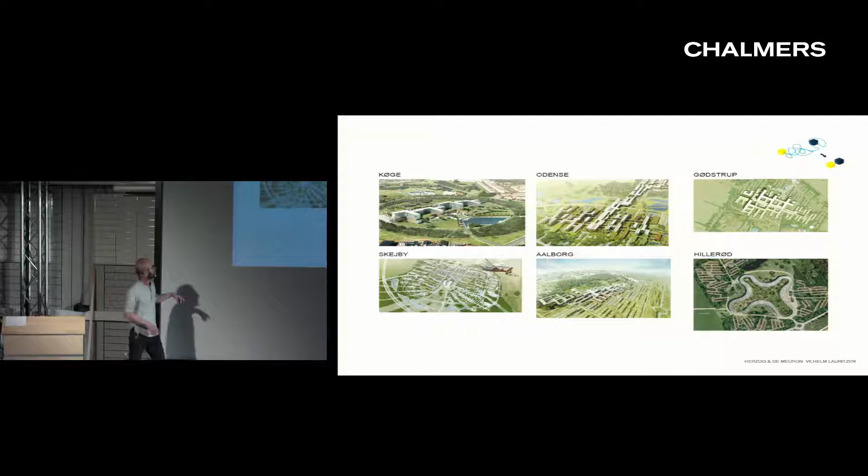This kind of structural way of looking at it, like the other hospitals, I think works to a certain extent. We can see that in some of the hospital projects in Denmark, for instance Hvidovre, that some of you might know, if you extend that too much, the distances from one end to the other become very difficult to tackle. There's sort of an end to the logic of just keeping on extending. At one point it makes no sense, and that's when you have to do a new hospital to keep up efficient distances and efficient flows.

So we're not too concerned that our hospital is not able to extend endlessly. There's a limit to how much it can extend. And our argument is that if you want to extend substantially more than we already have planned for, then maybe you get into situations where the hospital is not functioning as well as it should because of the distances between the functions.